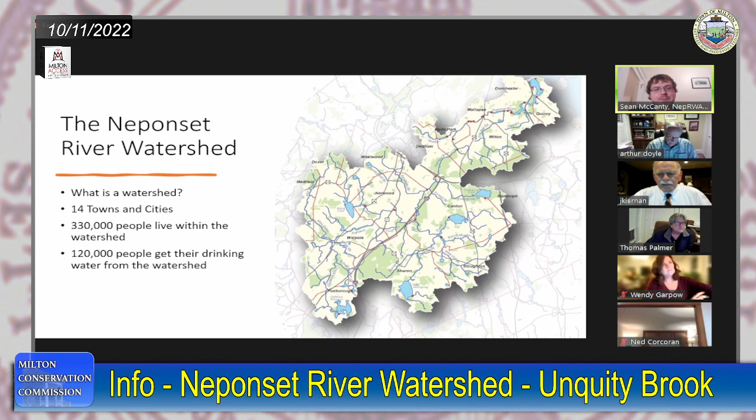A little bit of background: the Neponset River watershed is 14 towns and cities that contains the Neponset River and all the tributaries that drain into it. It's a large section, 120 square miles, and it contains many of the ponds, rivers, and places for recreation in our area.

So all the data we're talking about today comes from our community water monitoring network, which we helpfully named CWMN. It's monitoring water quality to track changes over time and identify where we can focus our resources to improve water quality.

So we look at 41 sample sites across the watershed. A little background: 10 of them are in the town of Milton. We sample them once a month from May to October.

So actually our next sampling is this Thursday, and it takes the effort of over 60 volunteers to collect these samples and process them. In the town of Milton, we have 3 sites on Pine Tree Brook, which is one of our cold water trout streams, 3 sites on Unquity Brook, and then 4 sites on the main stem of the Neponset along the border with Boston.

And so here you can see where those are. On Pine Tree Brook, it's just below Pope's Pond, right before it gets to Turner's Pond, and then Central Avenue right before it gets to the main stem of the Neponset over by Lower Mills. For Unquity Brook, it's off Randolph Avenue by Milton Academy, Adams Street where it enters a culvert, and then Squantum Street where it comes out of that culvert over in that area of town.

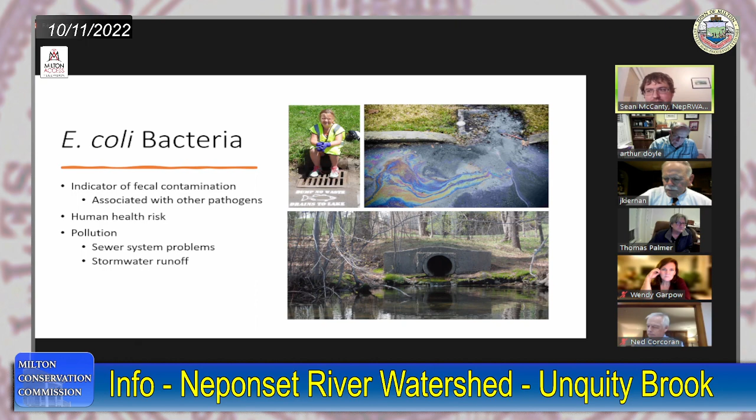The couple ways it gets into our water: it could come from sewer system problems, so sewer systems that leak into our surface waters, but it can also come from stormwater runoff. So anywhere that water comes off the surface of a road or something, it picks up pet waste, wildlife waste, or even human waste, and makes it into our stream systems and makes them not suitable for recreation.

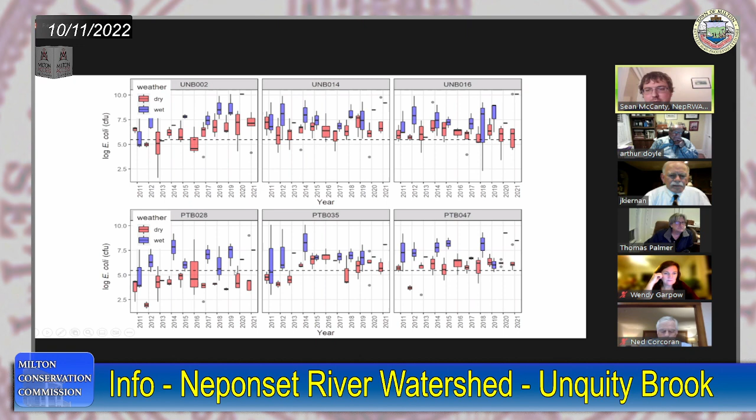More or less, we see that the bacteria concerns in the downstream regions around Adams Street and Squantum Street are more or less consistent over the last 10 years. It's not gotten particularly worse, but it hasn't gotten a whole lot better either. Similarly, Pine Tree Brook - we're not seeing a massive increase this last year in bacteria levels, but it is something we want to keep an eye on and see if we can improve in the future.

Sean, can I ask you a question, please? Yeah, absolutely. Thank you. On the Umpity Brooks, can you clarify the numbers denoting locations 2, 14, and 16? Okay, can you help us out with those please? Yeah, absolutely, so Academy...

So Milton Academy is 002. Adams Street is 014. And Squantum Street is 016. So they increase as you get closer to the main stem of the Neponset.

Just continuing this, when you say Adams Street, that is Adams Street and Governor's Road? That's right. We were there a couple weeks ago where the guy was redoing his stone. Yeah, but you've got a 14 score at the beginning of the culvert and a 16 at the end. Yeah, it gets worse, doesn't it?

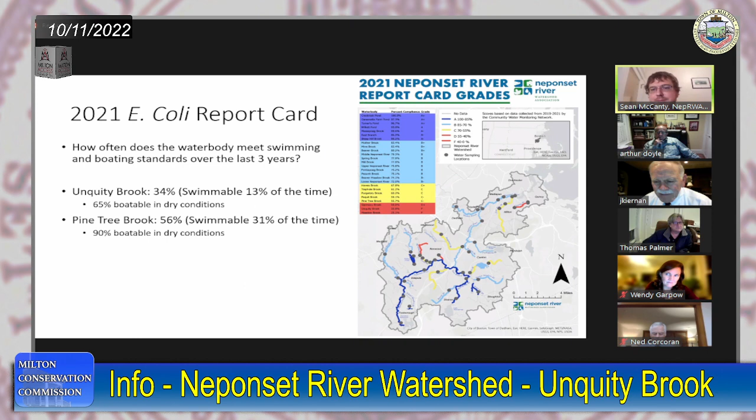Can you give us the same scoring? Because some of it sounds pretty bad so far, but give us the same scoring for Pope's Pond and especially for Turner's Pond. Yeah, so Pope's Pond, let's see, let me look at this real quick.

I'm not trying to feed you the answers, but I think they're pretty good scores. Turner's, I think, was an A+. Oh yeah, so the pond itself, Turner's Pond is an A+. We don't actually have a measure of Pope's Pond, it's not one of the sites we measure. But Turner's Pond, which is actually connected to Pine Tree Brook, is an A+.

So there is some good news there. Yeah, no, there's definitely good news. That's what I'm looking for.

And the other thing is, to the extent that those scores are pretty low for Unquity Brook, and to some extent in some areas of Pine Tree Brook, does that help us prioritize our remediation efforts? Or should it so help us? It does help us prioritize the remediation efforts.

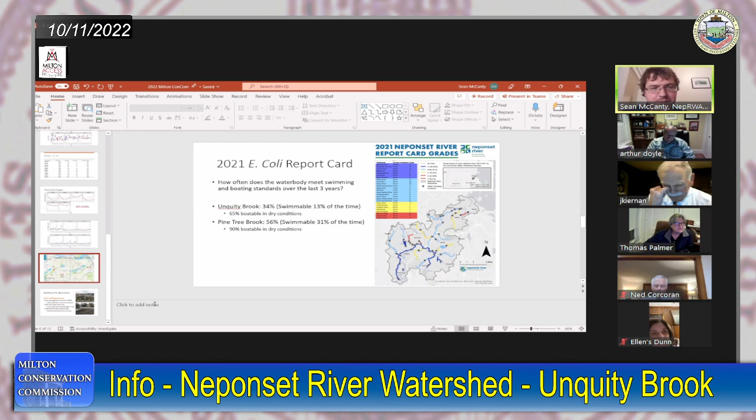I'll jump to the end here. One of the things we do with these scores is it gives us a sense of what's happening across these areas over the course of the year, and it helps us navigate where we can prioritize and drill down. That's part of our hotspot program, which is just taking a more detailed look at some of these issue areas.

One of the conversations we had with the engineering department and with their illicit detection program is that this is one of those things you have to put resources into in order to see results in the long term. So a program where you're looking at illicit detections and moving through—Marina Fernandez said they're at 25% of the way through checking all the connections. You may not start to see real tangible results until you get up towards 80 or 90%, but it's something you have to keep plugging away at.

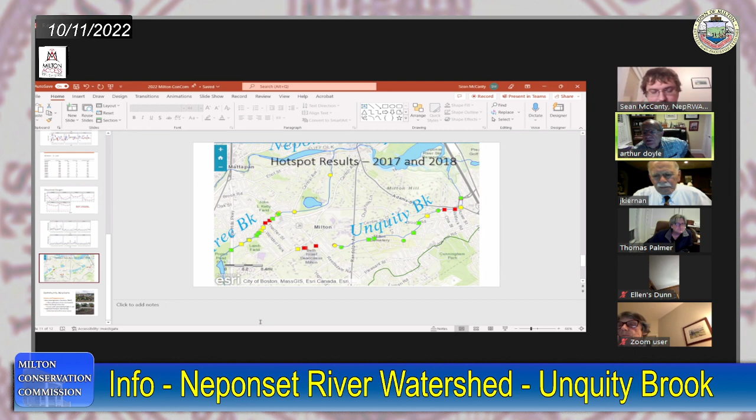John, just looking to the right of that piece, circle with the red, you see coming down Squantum Street, crossing Granite Avenue—yes—and that triangle—yes, to the best of my knowledge that's town-owned land—yes. Maybe we can talk with engineering about whether that's a possible site for a filtration system, a BMP filtration system, to capture the water coming down and filter it.

That makes perfect sense, except for the fact that that's a grassed area. That's correct. Isn't that going to absorb and clean most of the runoff? I should think the streets would be the most prolific in terms of contributing contamination. Well, that's what I was thinking. Diverting it from the streets into that area where a filtration system would be established—yes—okay, yes, I'm 100% in agreement with you.

I wasn't sure, John—has there been any discussion about that? Do you know? Unfortunately, I don't know. Okay, so we can talk with our engineering. Yeah, I do know that one of my colleagues, Declan Devine, is our BMP coordinator, so he might have more specific information. I'm happy to connect him with the Conservation Commission, and I'm sure he's been in contact with the engineering department.

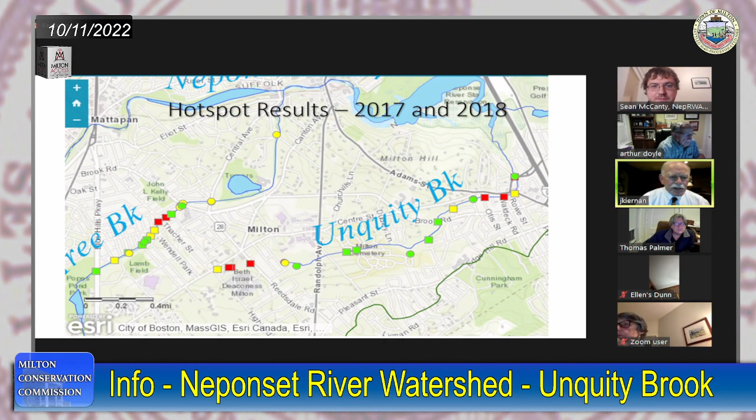Perfect, Sean, thank you very much. Unless there's a comment or a question, I can't see. Again, I'm only looking at 4 participants. Now, there they are. I don't see any hands there. Any question from Wendy or Tom?

I would just make a comment. I've been a NepRWA sampler for years, and the bad places have remained bad. When I say bad, I mean they're testing high for bacteria. It's not that they look bad or smell bad. The human nose is really good at detecting sewage, and most of the time, if you sniff Pine Tree Brook or Unquity Brook, it smells okay.

But I did notice an extremely foul odor at PTB 047 recently, where Pine Tree Brook goes under Blue Hills Parkway. There's a little mound in the median, and on the downstream side, there's a sewer manhole that stands up above the ground in the trees there. I was just walking down the parkway and walked by that about a week ago, a warm day, and it was a really putrescent, horrible odor coming out of that manhole.

Something about the wind just allowed me to sniff it at that moment. But that's always been a bad spot for bacteria when you test the brook. It seems to me that the reason wet weather grades are so bad is not that pet waste is washing off the parkway, but our very old sewers are leaking into the brook. That's why I think we have these bad stinks in wet weather where sewers are near wetlands, and I think that's what we're going to have to deal with eventually. It's very good that we're cleaning runoff as it approaches the brook, but until we can keep the sewage out of the brooks, they're going to score high.

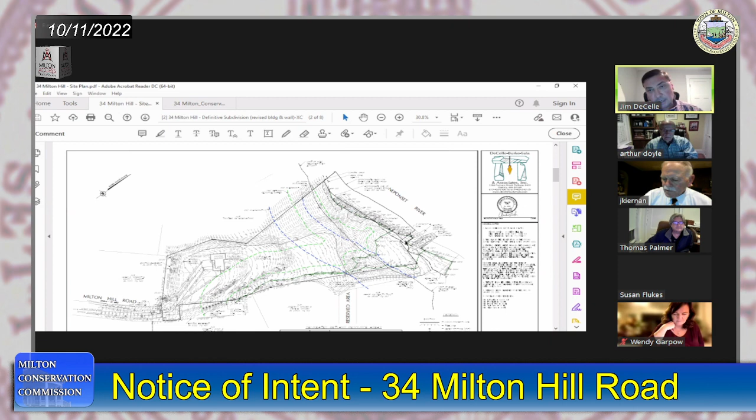This is the wetland line associated with the river. Let me zoom in a bit more so we can see. This is the old upland line from the original plan. This is the FEMA zone, elevation 11, which comes right up around the top of the riprap. This is the coastal bank in this area here. This is the 100-foot riverfront, and this is the 200-foot riverfront. This green line here is the 25-foot no disturbance off the riverside, and this is the 100-foot wetland buffer.

So our concern was mainly with the 200-foot river. The wetlands were flagged by Ecotech, and there's a series of flags along the bank, then wetland flags in this area down here, which is a larger area of wetlands. You'll notice it's almost like a drainage ditch - there's a small channel that runs down the property. The existing driveway comes in here, and there was another driveway that went down to the dock at one time that's since been grassed over. You'll notice there's an old boat ramp and old dock here, and we'll be back before you hopefully soon with plans to rebuild that.

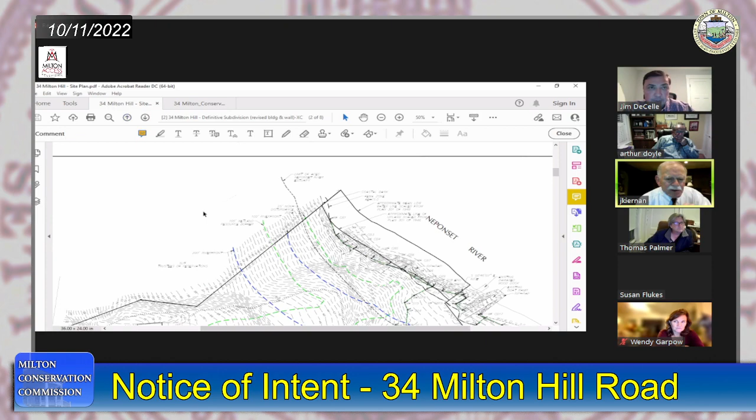Can I hold you there? Go back to those flags - I know you said you replaced them so we'll be able to see them, but what are they based upon? What I'm really asking is when was the delineation made? The delineation was made in the spring. This year? Yes, it was this year. Okay, gotcha. It's just that with the sale and everything else going on, and then the subdivision, these flags got wiped out by lawnmowers and so on. So we replaced these, and you'll see why - it's pretty clear to understand why they got wiped out.

Let me go to the next slide. This is our erosion control - we're planning erosion control all the way down this area here. And the only time we actually go into the outer riparian zone is for an outfall pipe here for our drainage system, so we come around here and you'll see that. We have wattles planned surrounding the whole construction site so nothing will get out. We're planning on removing 19 trees flagged in the buffer here, and there's one over here we're taking out because it's right at the entrance of the driveway, and we have to widen it for the fire trucks. So all the work we're planning is in this area.

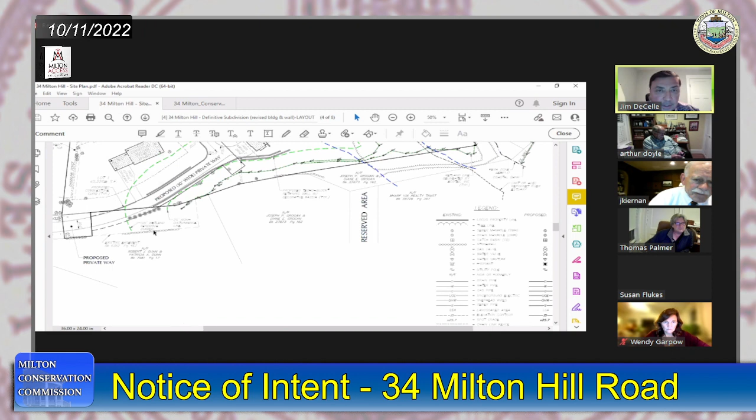This is the tree removal count. And my limits of trees are deciduous and coniferous. I have those; these are all, the trees that are coming out are all deciduous trees. And 4 to 8 inches, we're removing 10, and 8 to 18, we're removing 10.

They're mostly easy to show, we can have them flagged, but they're mainly along the edge of the existing driveway that's there now. It's basically because we had to increase the road for the fire department, and the grading along the edge due to that widening of the road.

All right, well, as part of the tree survey, if you can identify the ones that are coming out, that would be very helpful. I know you've got measurements there, but we're trying to shift from our old performance standard of 3 to 1, and we're using circumference at breast height, so those measurements we're going to need eventually.

So the idea is to replace the same sum of the circumference inches, or whatever measurement you're using. Kathy sent us over your new regulation. So yeah, I can put that together for you for the site walk. That would be very helpful.

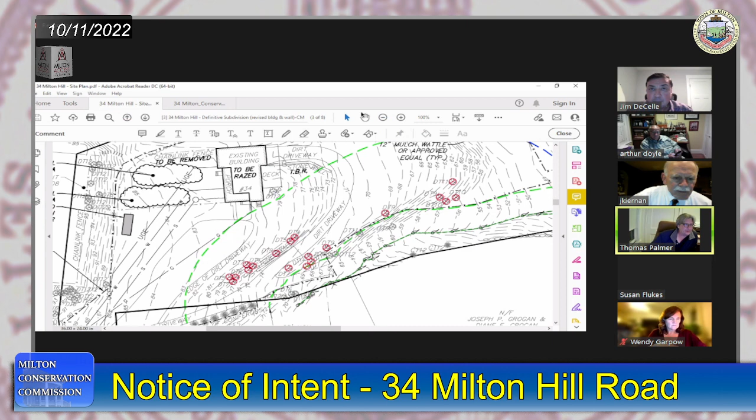Did you get her email? I'm trying to find it. Yeah, I'm looking at it. Oh good, she said it was available the 10th, 20th, and 11th, 12th.

The 20th is not a Saturday. Right, I saw that, I think she meant the 22nd. Yes, I noticed that too, there was a mistake in the email.

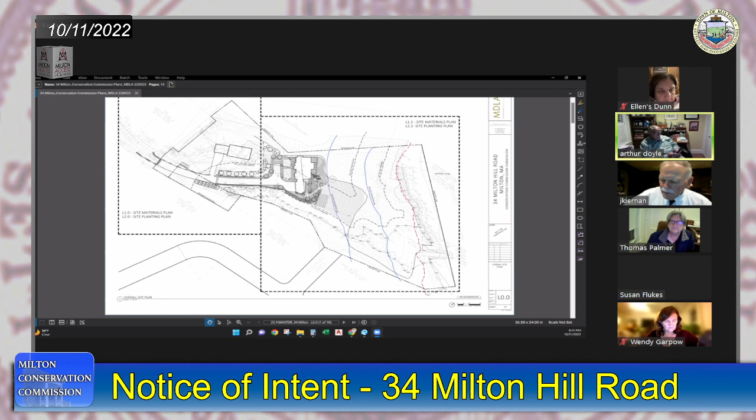Tom, what were the two dates again please? In her email she says the 10th, 20th, and 11th, 12th. Okay thanks, the 12th is on a Saturday, so she must mean the 22nd. Thank you.

Well, I can do either one of those. Yeah, I'm good. All right Arthur, can you? I'm good. All right Wendy? Either of those work for me as well.

Beautiful, okay, we've got four, and if those are good for Ingrid, I know she'll want to be there. That's five, and I'll talk to Todd and Hans.

So why don't we do it earlier rather than later? Because our next meeting is the 15th. So if we spot any issues, it would be better to go on the 22nd so that we could give the applicant time to respond to our questions on the 22nd, before our next meeting on the 15th.

So why don't we target Saturday the 22nd at, Wendy, 8:30, okay? I have to check the time with you, sorry. Yes, thank you John, I appreciate it. Okay, all right, 8:30 a.m.

Can we meet you on site at the Forbes Road entrance? On Milton Hill Road, you mean? Milton, yes, I'm sorry, I've got it backwards. Yeah, right at the end of Milton Hill, you can probably pull right in the driveway.

Okay good, all right, but again, I'm not cutting off debate here because I would like to hear the landscape plans. Can you guys see my screen? I'm Mike D'Angelo, landscape architect, my firm's MDLA. Do you see the screen? Yes, got it, thanks Mike.

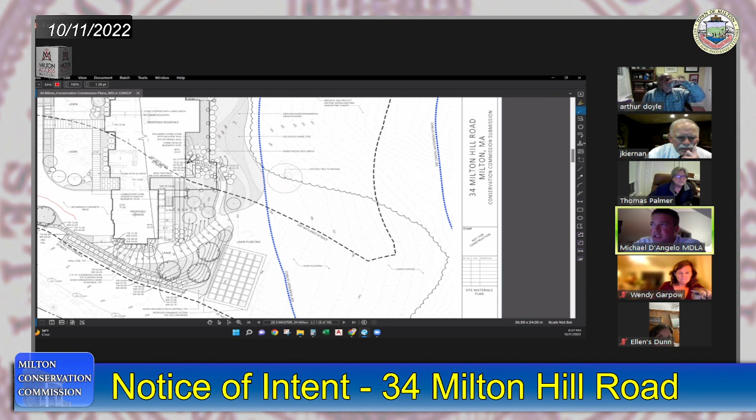There's a mown pathway that takes you down this slope to the lower level and then down to the backyard, and some natural stone steps that take you up to the walkout basement level. Very simple landscape design, permeable, really focusing on making it look like a natural landscape planting.

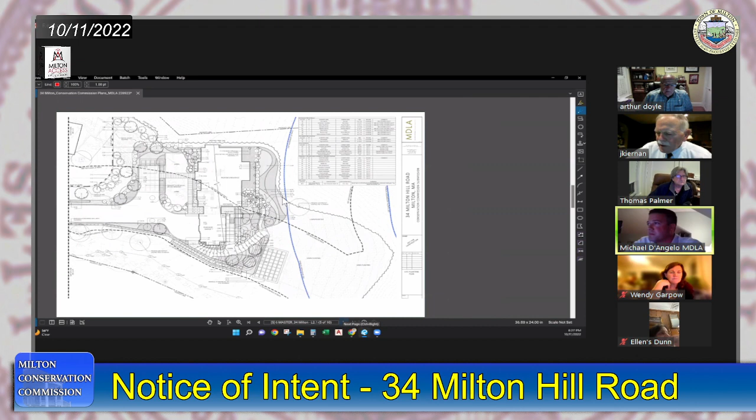I'll show you some of the plantings we're proposing. So we have about 6 trees: box elder, serviceberry, gray birch, American yellowwood, tupelo.

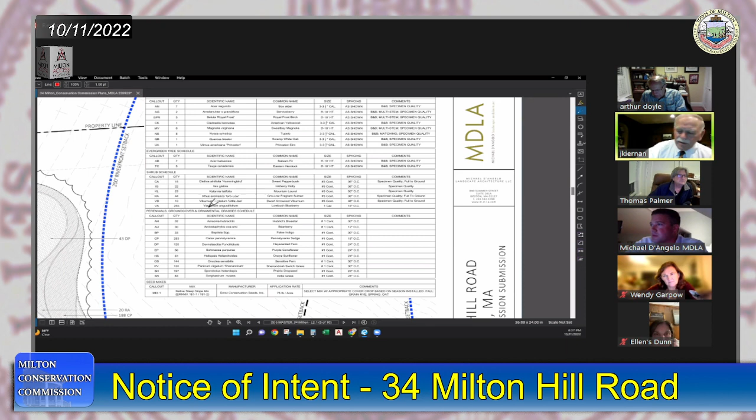Clethra, berry, mountain laurel, Gro-Low sumac, viburnum - a lot of really good hardy native plantings to try to stabilize any of these slopes we're dealing with on this property.

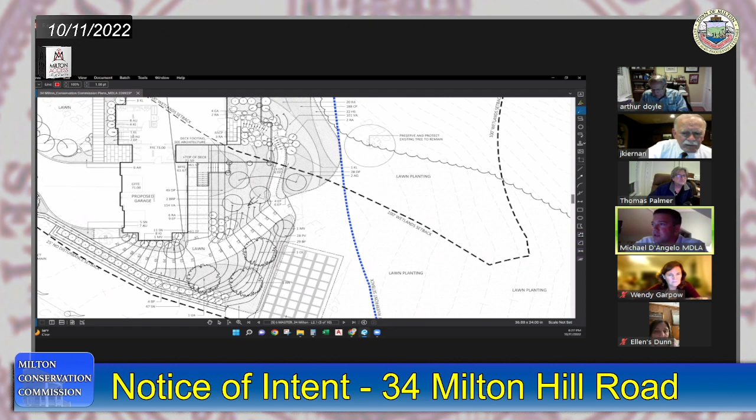I think I have some photos in this package too. That's the color plan that might help explain it a little better. You can see that the only lawn we have is in the front yard. Otherwise, we're really trying to plant these areas and make it look natural, introducing boulders, flowering trees, taller deciduous trees along the driveway, planting between the wall with some sumac, and planting these slopes leading up to the house.

How big is the house? JD, you want to answer that? Yeah, it's about 5,500 square feet. Okay, thanks.

And then just some images of the trees: the tupelo tree, the magnolia, the birch, swamp white oak, serviceberry, and some of the understory shrubs: the panicum, bearberry, the sumac - we like that one, it's a good slope stabilizer. So is the low bush blueberry, and some clethra for the lower areas.

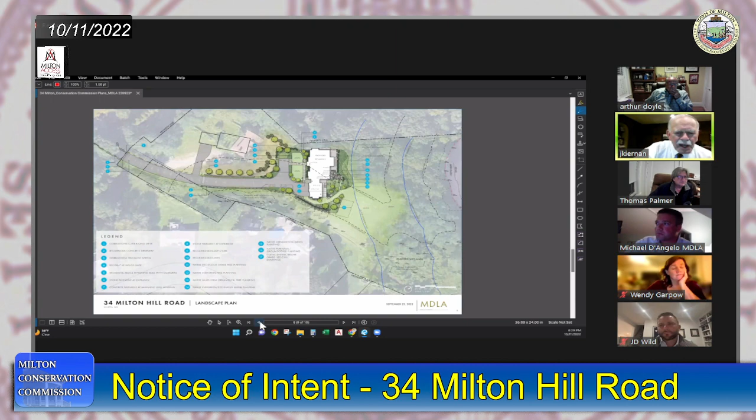And that's it, do you guys have any questions? Wendy, any questions from the horticultural perspective, the variety of plants? I don't think so, John. Not at this time, thank you. Okay.

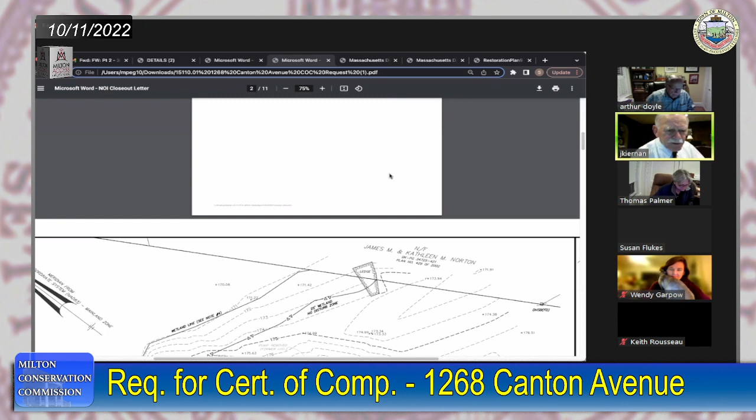I agree, we should go ahead. All right, so we'll put it on for the 22nd. It'll probably be 9:30, but I'll give that information to Kathy Bowen, and she can reach out to Mr. Mazzoni.

All right, thanks. Next on the agenda is request for certificate of compliance, 669 Randolph Avenue.

Now that one, I am thoroughly confused because the dates are what are throwing me off. Is Deb Keller here? I am here. Good evening. Hi, welcome. Can you help us out, because I'm bouncing back and forth between June of 2020 and September of 2022, and I can't tell what was done when.

Sure, I can go through that briefly. Deb Keller with Merrill Engineers and Land Surveyors. We submitted a request for a COC for 669 Randolph Ave. We completed an as-built survey back in June 29 of 2020. The project was to install, extend a driveway in the backyard, and install a rain garden to treat that runoff prior to discharge off the property.

So the driveway and the rain garden were installed in June of 2020. What we waited for before filing the COC was making sure that the vegetation within the rain garden survived, so we waited two growing seasons for that. What happened the summer of 2020, with COVID and everything, kind of slowed us up, so that's why it took us a bit longer to get back to you.

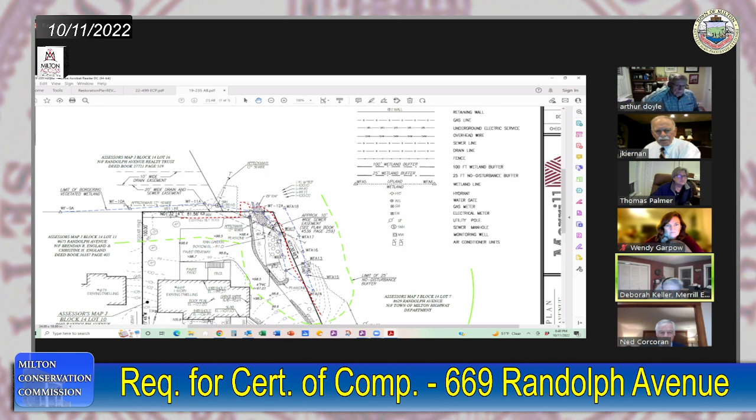Zoom into this back area here so you can see. The red maple was installed just at the end of the driveway here, right along the property line. This is the area of driveway that is new, and we had a pea stone diaphragm along this edge. This proposed driveway pitches over here to the rain garden. It also captures runoff down the driveway, so we have a little forebay here, and then riprap at the outlet before it ties in.

As you can see, these are 4 16-inch pipes that come off the abutting property, which is the DPW. I don't know if that's all where this water is coming from, but it's coming from the DPW property and runs down through the backside here, which is a drainage and sewer easement. So this rain garden discharges into that flow path, and that was the existing conditions. So the rain garden here was to treat this new portion of driveway, and the maple tree is here.

Was that planted or was that pre-existing? No, that's a new tree planted. And I believe in the letter we showed... That's what I was looking for. Oh yeah, so on the second page of photos, the bottom one has a photo of the rain garden, and just on the left-hand side you can see the red maple tree right on the corner of the pavement.

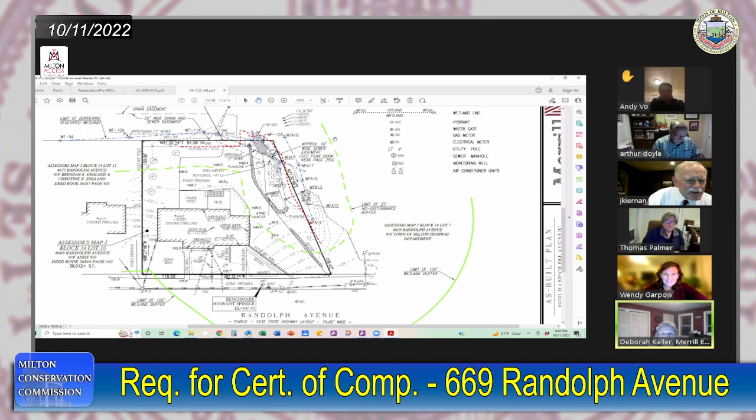I'm sorry to interrupt you, John. There's a hand up from someone in the audience. Okay, with the screen I can't see... sorry. Oh, Andy Vo. Let me stop sharing. I think you can see it now. I can see it, my apologies.

Andy, good evening. Hi, this is Andy from 669 Randolph. Just want to thank this committee for helping me out, allowing me to build this rain garden. I don't know if you remember, but in the past there was a lot of rainwater getting into my house. But with this rain garden, it's helped a lot. There's no flood after this was built. And I just want to thank this committee. And also the red maple is great, it's surviving very good. I replaced the blueberry, and like Deb said, the willow tree is starting to come back. Just want to thank this committee. That's all, thank you, appreciate it.

Oh good, well thank you too for working with us, because I have a very clear memory of being there and seeing the flooding, and anything we could do and you could do to correct that is good for everybody. So thank you. Yeah, thank you.

All right, I don't see any other hands. So there's a motion. Wendy, did you second it? I don't think so, but I will. Okay, I wasn't trying to coerce that, whip the vote. I wasn't trying to do that, but all right.

So there's a motion to issue the certificate of compliance based upon the representation by the PE, Ms. Keller, that there has been substantial compliance with the order conditions. Is there any further discussion?

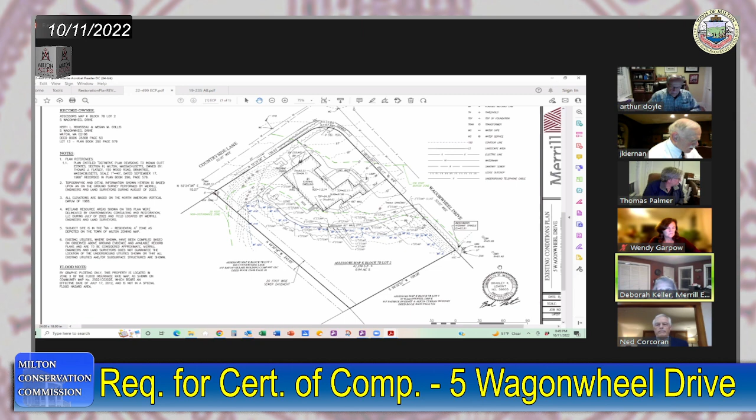I'm lost in terms of the stabilization, I would hope it would be stabilized after 40 years or so. Yes. But does this certificate of compliance with the original order of conditions include the structure itself? I mean, there was an engineering plan that was not just landscaping, because our enforcement order, which is the next item, is really an issue of landscaping and what's surrounding the house.

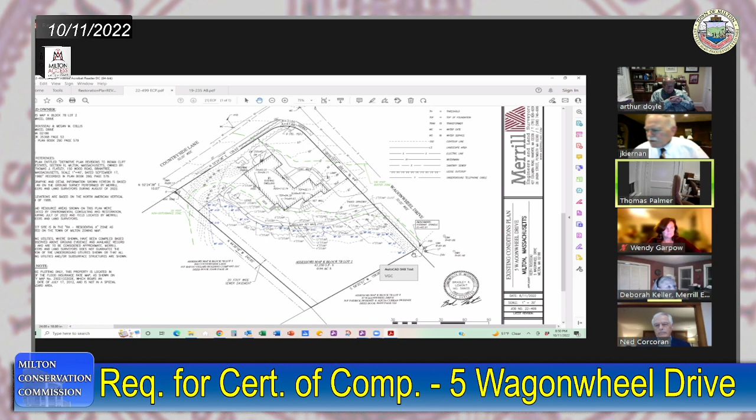Correct. Unfortunately, since the 1984 order is so old, we couldn't find a record plan to go along with it. So the only document we had to use was the conditions that were within the original order.

I'm sorry, you do have the original order? We have the original written order, but there was no plan associated with it. That I understand. Okay, so unfortunately, this order is 4 pages long.

They were definitely not as detailed as our current orders are, but reading through it and following it, it seemed that this order really focused on maintaining the sewer easement on the property, not allowing the drainage flow pattern to be blocked, maintaining and minimizing any erosion during construction. And as noted, taking the tree removal aside, the site is fully stable. There is no excavation, current excavation or any exposed soil at this point.

All right, if you could just give me - and I don't think this is in everyone's packet - I had asked Kathy to go back and see what she could locate, and I don't have the plan here either, but I do have the order. I just, the special conditions are what I'm interested in.

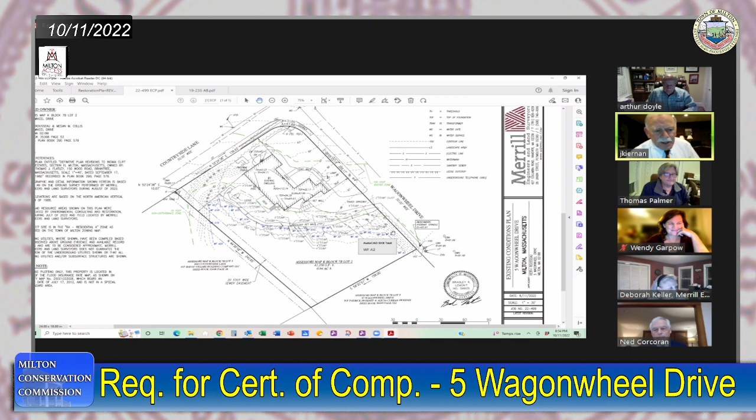It's not there. Any questions from commissioners on this issue? All right, well, we have - are there any abutters or members of the public that have a question or would like to make a comment? I hear none, and what we're confronted with is a request for a certificate of compliance with the original order of conditions, which is dated...

I know it's 1984, it's dated December 14th, 1984. And it appears that the construction of the house was done in compliance with the order conditions, and that has been attested to by Deb Keller as a professional engineer.

So I would entertain a motion to issue the certificate of compliance. So moved. Thank you. Is there a second? Second. All right, thanks, Tom. Any discussion from commissioners? Hearing none. Arthur, how do you vote? Yes. Tom, how do you vote? Yes. Wendy, how do you vote? Yes. And I vote yes, John Kiernan as well.

So thanks, we go on to the next agenda item, which is the enforcement order at 5 Wagonwheel Drive. Deb, you've got the floor again. And I think maybe I've got Ned, the floor - go on that. Okay, thanks, John.

Deb, Ned Corcoran on behalf of Keith Rousseau. I picked this up recently. I know that there was a hearing on September 13th. It appeared from the record that the hearing was closed. There was an approval of a plan, but Steve Ivis and Brad Holmes, who was the landscape architect, went out and took a second look and added another layer of proposed buffer replacement trees right along the buffer edge, which

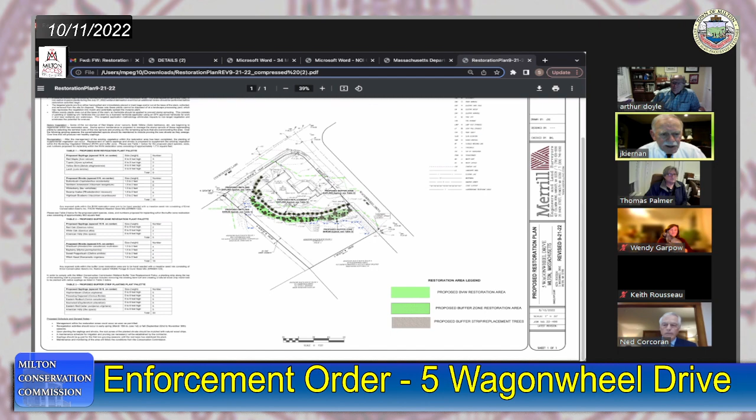I just think we need to be consistent in dealing with these issues and ensure that we have that 2-year survivability plan protected. Any suggestions of a different approach or any other ideas?

I'm not hearing anything. Okay, other members of the public? I mean, I'm perfectly comfortable relying upon Steve. And Steve did say that he thought the plan was good and would work. So I'm comfortable with that part of it.

Our discussion at our last public meeting was such that conceptually we agreed to that approach, that as long as he approved the plan, we gave him that authority to move forward. So I think we're at that stage. And I think the way to protect both the Conservation Commission and ensure that the homeowner complies with the state standards of 75% survivability after 2 years, I think the bond is the way to go.

Any other comments? Are there any abutters or members of the public that want to make a comment or have a question? All right, hearing none, is there a motion to lift the enforcement order on the condition that the plantings get planted and they can start right away, and hopefully take advantage of this weather to start the growing process, and then bond that amount until the certificate of compliance is requested, which would require the two-year period of survivability? Is there such a motion to do that, or a better idea?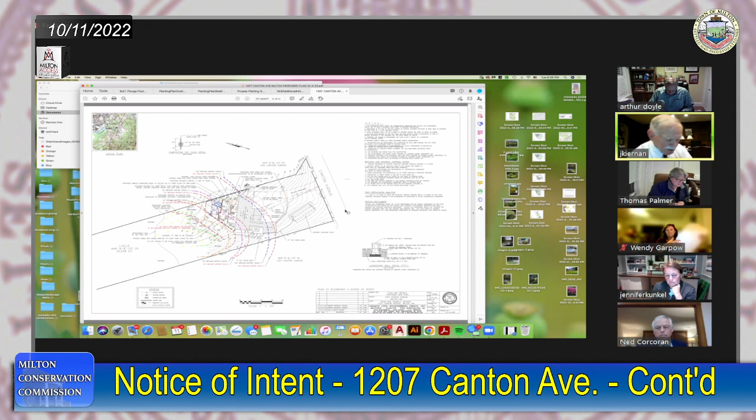All right, I didn't mean to get hung up on that. That sounds like an easy fix. There are some other issues though that we discussed, and part of it has to do with the last discussion we had, Tom. You were concerned with the treatment of the invasives, and we got kind of bogged down in that discussion at the site walk. I'm not saying it was a bad discussion, it's just that I don't think we ever resolved it. So where are we on that?

What's the proposal from the applicant and the response by the Conservation Commission to use or not use the herbicides? Are you asking us? I'm looking at Tom.

Well, just to jump in, I would say that I did question an order that we would issue that would approve the use of herbicides in the wetlands. That's what was proposed—I believe it was painting the stumps of the woody broadleaf invader, namely porcelain berry, which is just taking over the wetland. I certainly didn't object to removing it, but I said it would be nice if it could be removed mechanically, because then we wouldn't be concerned about other impacts the herbicide might have. Since we spoke, I did read more about triclopyr in some depth, and I feel it's regarded pretty much as safe for landscaping if it's used properly.